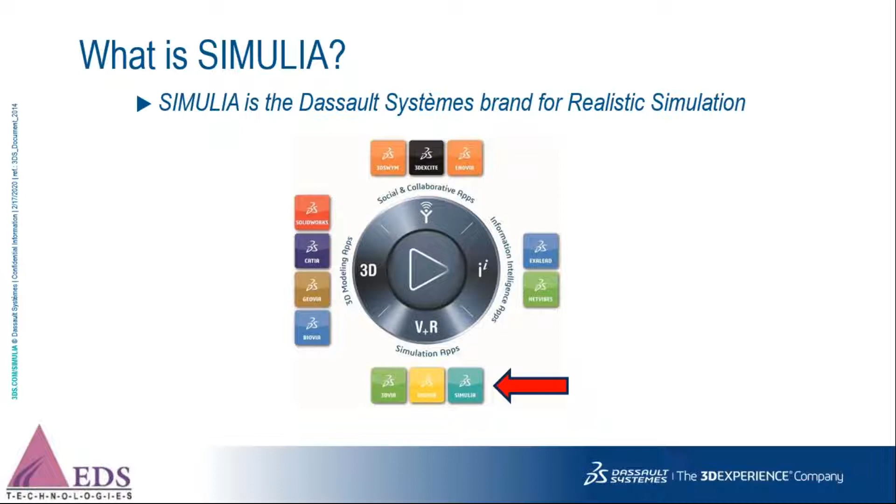So, coming to Simulia, Simulia is a brand for realistic simulation application. What is Simulia? Simulia is the Dassault Systèmes brand for realistic simulation. As you can see on the screen, a compass which has 3D, I, V plus R, and social and collaborative apps. So under V plus R, which is nothing but virtual plus realistic, all the simulation apps come under this category on the Simulia compass.

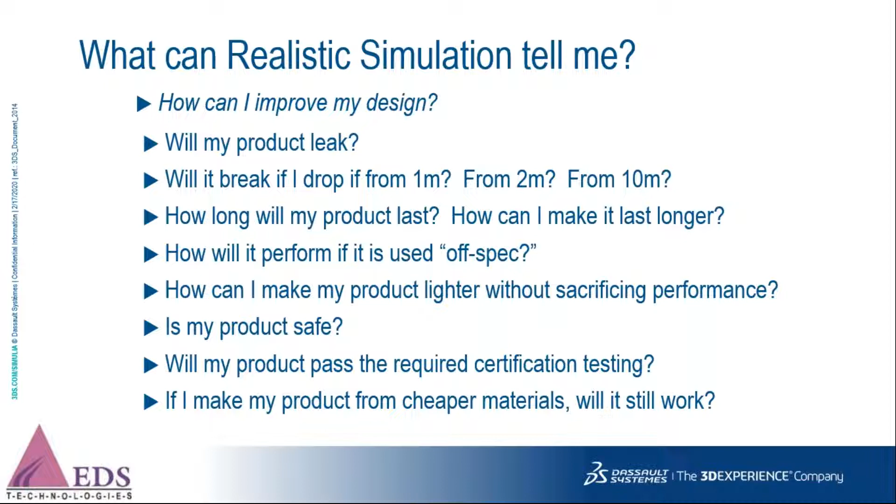Now, what can realistic simulation tell me? Most of the times, with the help of realistic simulation, you can ask questions like how can I improve my design, how will it perform if it is used off spec, as well as will my product pass the required certification testing, or even you can find about the life, how long a product will survive, etc. So all these questions can be asked and answered through realistic simulation.

Now, coming to realistic simulation, what kind of industries use realistic simulation? So almost all the verticals that we know of are using realistic simulation. Some of the examples are transportation, aerospace, heavy industry, biomedical, etc., as you can see on the screen.

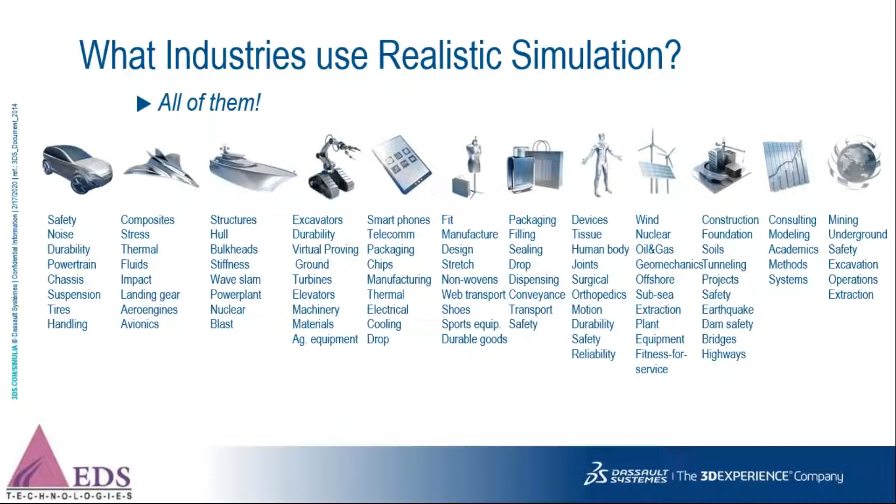Now, going more into the details, let us talk about who are the users of realistic simulation. Again, both commercial as well as academic. When it comes to commercial, designers, design engineers, simulation specialists or analysts, as well as researchers use a lot of realistic simulation to validate their tests, so that they can decrease the product life cycle time.

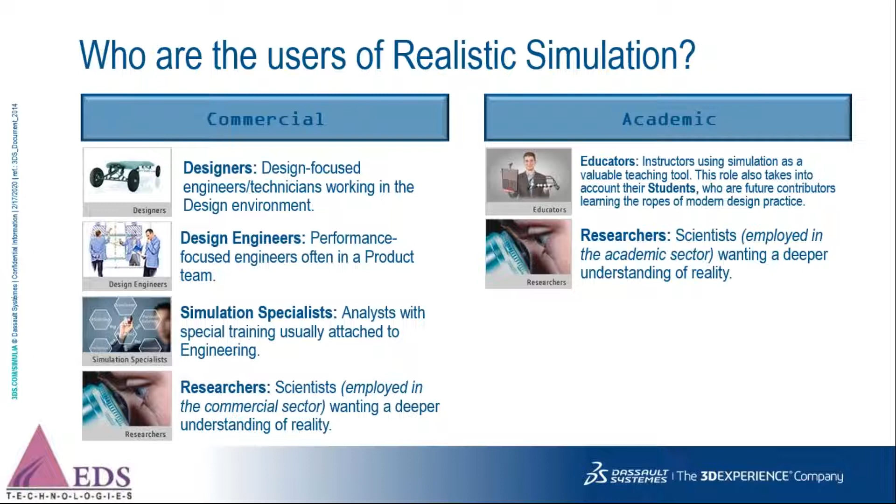As well as academic, like educators or researchers from the academic field, instructors using simulation as a valuable teaching tool. They make sure that the students are well equipped with all the simulation tools, and scientists who are academic researchers, specifically employed in the academic sector, who want to develop new technologies and want a deeper understanding, use realistic simulation.

Now, coming to Simulia's power of portfolio, what is power of portfolio? Under power of portfolio, we mainly have 4 different softwares, as shown on the screen on the left hand side. These 4 softwares are Abaqus, which is more physics and open co-simulation kind of a software.

With the help of Abaqus, we can perform Abaqus implicit or standard analysis, as we refer to, and Abaqus explicit. Then there is the coupled Eulerian Lagrangian method, fluid structure interaction method, the SPH method, the electromagnetics method, as well as Abaqus CAE, which is used to build a model, be it geometry cleanup, meshing, applying boundary conditions and loads, etc. All that can be done through Abaqus CAE.

Then comes Isight. Isight is a process automation as well as a design optimizer, which is used to run a design of experiments. Isight consists of design gateway, application components, and process drivers. So many design of experiments can be carried out through Isight, and it uses optimization techniques like Latin Hypercube, Six Sigma, etc. to quickly give results of optimization.

Then comes Tosca. Tosca is a topology optimizer, and it can carry out both structural as well as fluid flow optimization. It also has linear and non-linear optimization capability. To give an example, what Tosca basically does is, I have a baseline model. I feed it to Tosca along with the baseline results. Keeping those results as constraints, Tosca tries to carve out the best design, thereby reducing the weight.

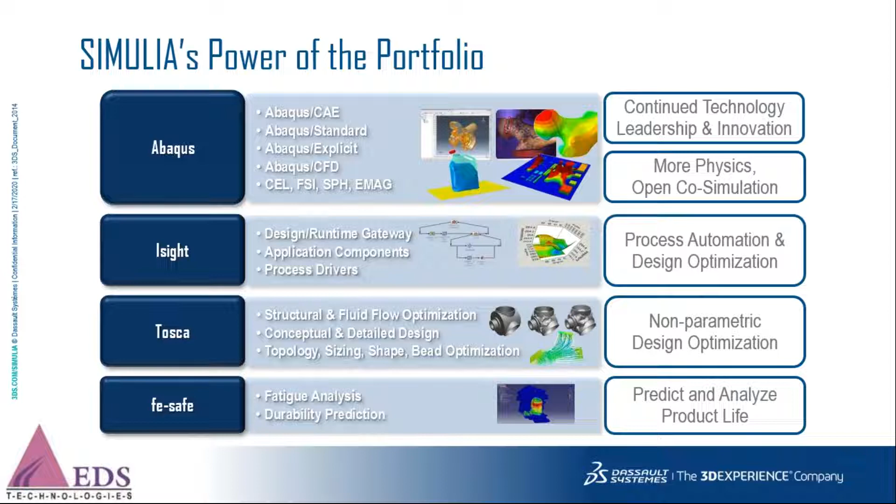So this all comprises Simulia's power of portfolio, namely the 4 softwares, which are Abaqus, iSight, Tosca, as well as FE-SAFE. Now let us have a look at an overview of Abaqus. We'll spend a few minutes on each of these 4 softwares to understand the capabilities.

So Simulia's foundation has been Abaqus, and as we all know, it's one of the world's technology leading suites of finite element analysis. The different types of analysis that can be carried out using Abaqus are linear and non-linear, implicit as well as explicit dynamics, contacts, which is one of the strong points of Abaqus, certain types of fracture analysis, composites analysis, as well as co-simulation like thermal, structural, etc. All these kinds of sophisticated analysis can be carried out through Abaqus.

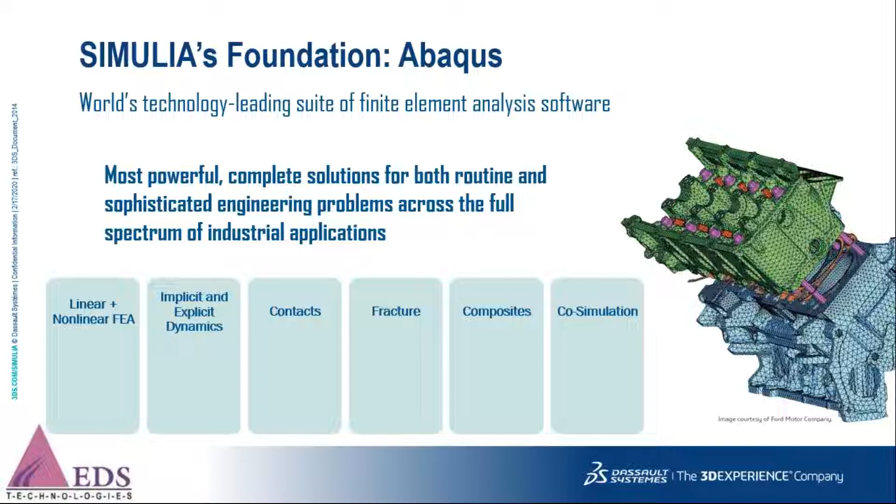And as I say, it's one of the world's leading. It's also one tool for all. So any kind of simulation, be it a dynamic, crash analysis or hydroplaning of tires or structural analysis, all these can be carried out using Abaqus. Some of the examples are shown on the screen right now.

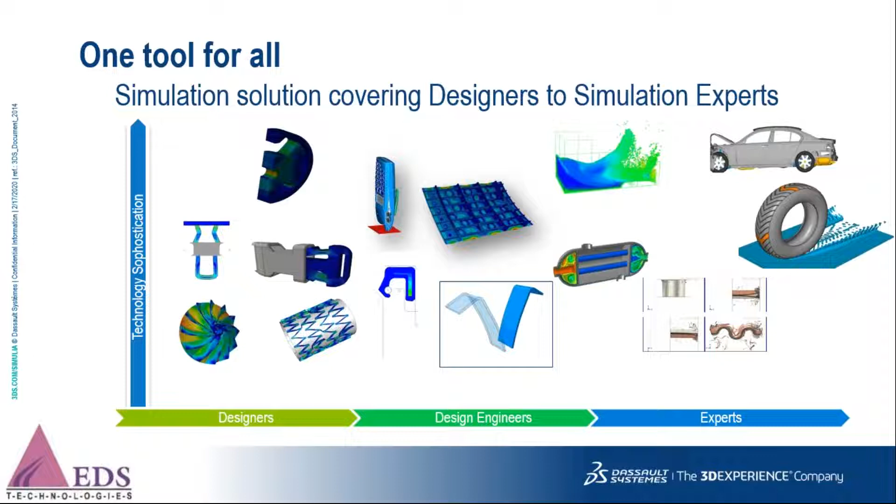Now, as I said, Abaqus products are made up of two branches. One is the solver, which you can see in the first point, that is the standard or implicit and the explicit solver. So this is mostly for non-linear engineering capabilities. And of course, these solutions are all designed for production use. All the results have already been validated, and hence I can directly use it for production use.

And then comes the Abaqus CAE. It's a complete environment for pre-processing as well as post-processing of Abaqus analysis. Abaqus CAE is a preprocessor wherein I can build pretty much simple to moderately complex parts. I can do basic CAD cleanup. We can do the meshing, load and boundary condition application through Abaqus CAE.

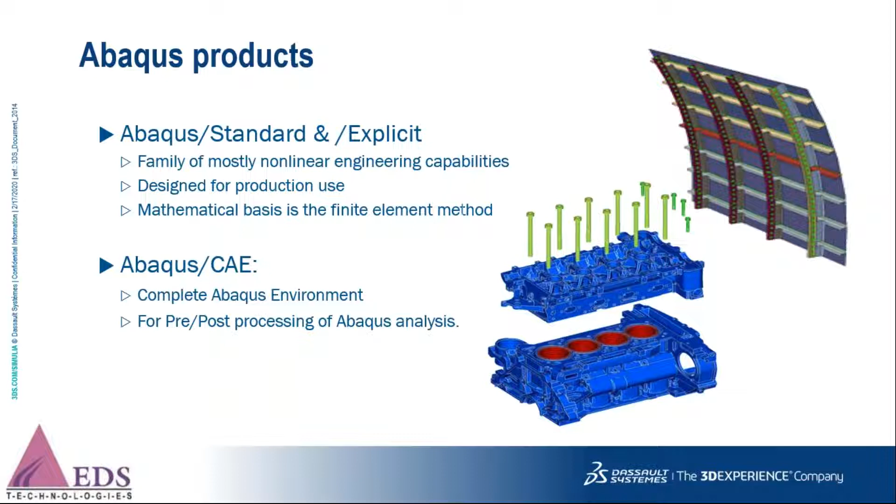And then we have Abaqus Viewer, which is one of the world's top class, best-in-class viewers, wherein I can go ahead and check my results, do hot spot result extraction. We can visualize how a certain component behaves under a certain load condition, etc. This is all through the Abaqus CAE as well as the Abaqus Viewer.

How does it all fit together? This is one example of the GUI of Abaqus on my screen. We have a dedicated SolidWorks as well as a CATIA associative interface, meaning whatever changes I make in SolidWorks can be reflected directly onto your Abaqus GUI. The layout of the GUI is pretty simple. You can see a small module on the screen. The module guides the user to set up a model in your Abaqus CAE.

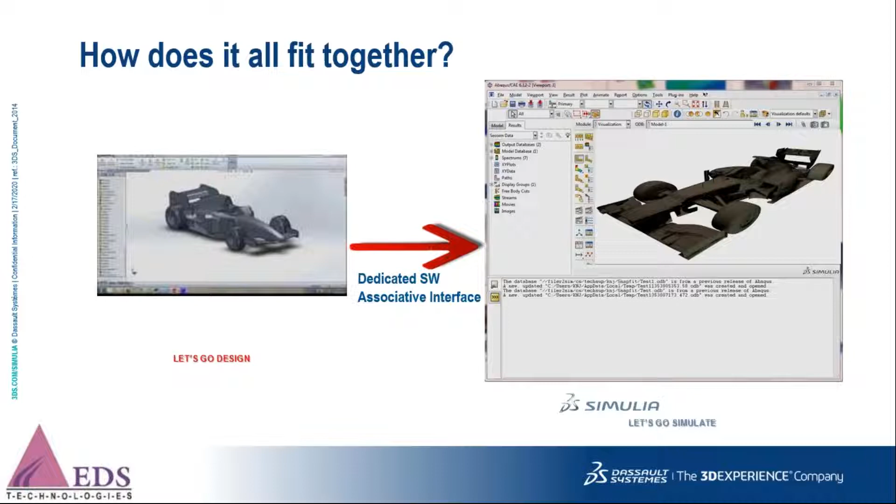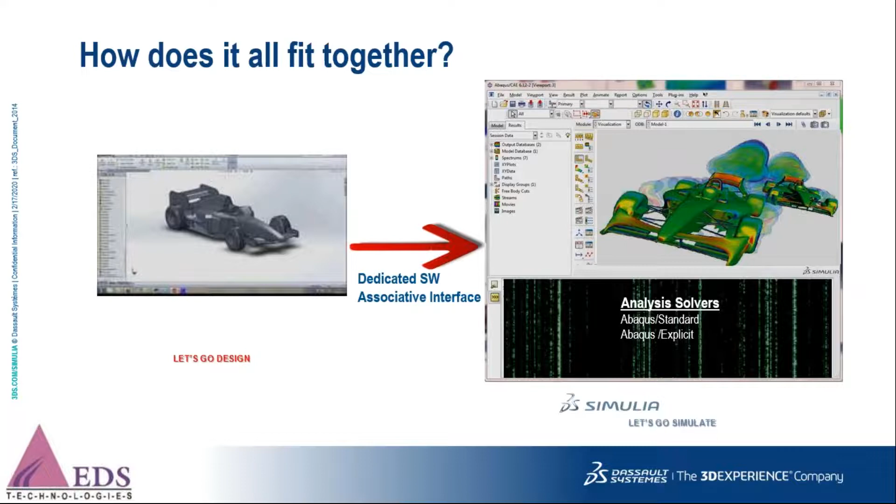And this is the viewer. So once the run is complete or once the solution is achieved, in the module, as you can see, it has been switched to visualization, wherein I can see how the load conditions are acting. So this is the viewer.

Now, Abaqus also provides solutions for an entire range of industries, be it consumer packaged goods, life sciences, high tech, energy, etc. Some of the examples again are shown on the screen. These are the industries that are currently extensively using Abaqus day in and day out.

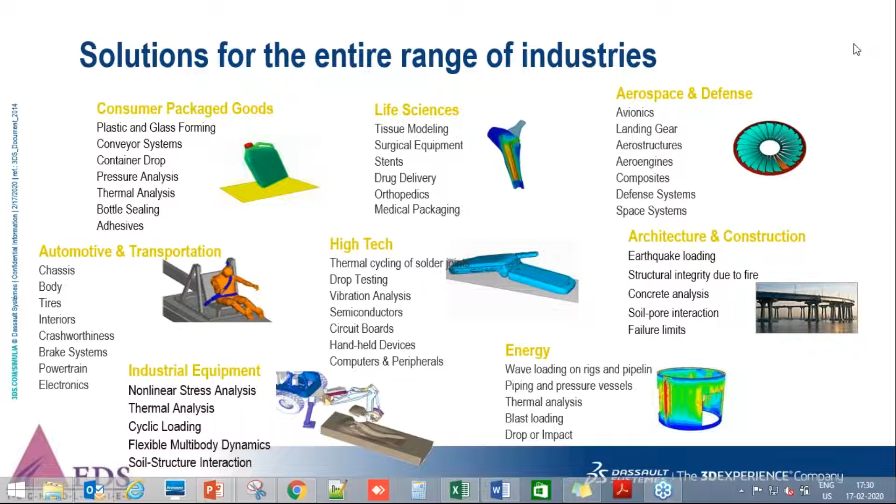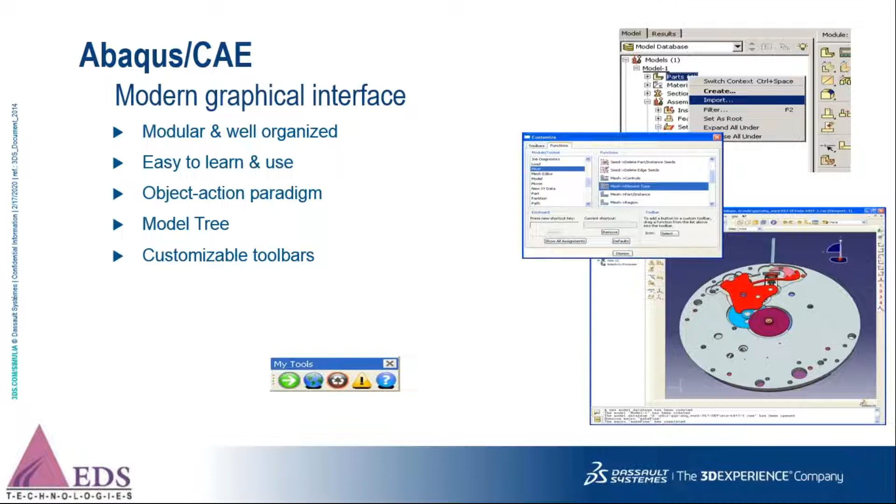Now, let us talk a little bit about Abaqus CAE, what Abaqus CAE is, what it comprises. So it's a modern graphical interface, and like I said previously, it is very well organized and very easy to use and even to learn. It also has an object action paradigm. There are customizable toolbars as well as a model tree, which makes the job easier to work on.

Again, it also has geometry and model import. So either I can import a geometry, or if I already have a mesh model from some other third-party software, I can even import that. And we can create simple to moderately complex geometry directly in Abaqus, not through any CAD software, but through Abaqus.

And the associative CAD interface also preserves analysis attributes when the geometry changes. Meaning, I have made a component in CATIA, then I have already built up the model in Abaqus. I run the analysis, and then the analysis suggests to me to make certain changes. So when I make these changes on CAD level in CATIA, all these changes are reflected into Abaqus because of the associativity, and I don't have to recreate the model or the boundary conditions as such. It is all taken care of because of the associativity. So that's what it means when I say it preserves analysis attributes.

And apart from that, a complete set of geometry repair tools. If I want to do a geometry cleanup, defeature certain features like fillets, washers, etc., if I have to repair certain faces, re-sew the surfaces if it is not watertight, etc., can all be done using the set of geometry repair tools.

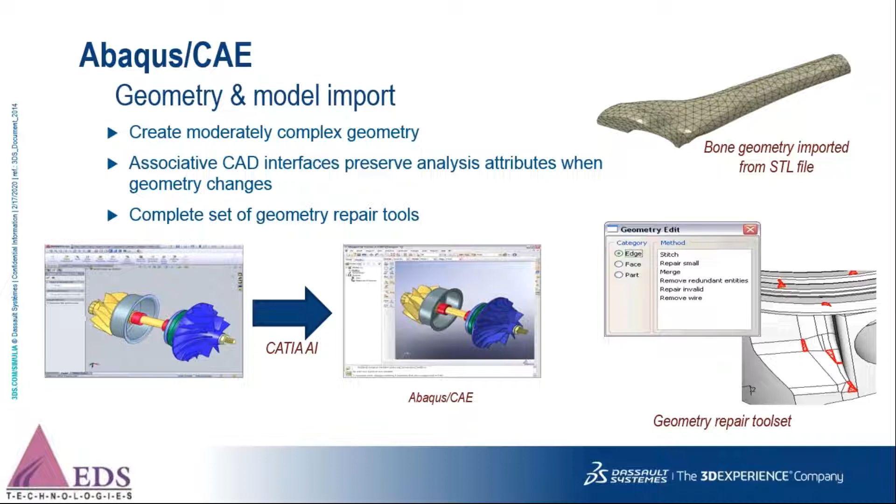Again, when it comes to meshing, very powerful and flexible meshing algorithms are available in Abaqus. It's pretty fast to create automatic free meshing, and certain semi-automatic hex meshing is also possible. As well as many different ways to import the features, mesh them and assign the mesh properties. These are all very easily and quickly accessible tools available in Abaqus CAE.

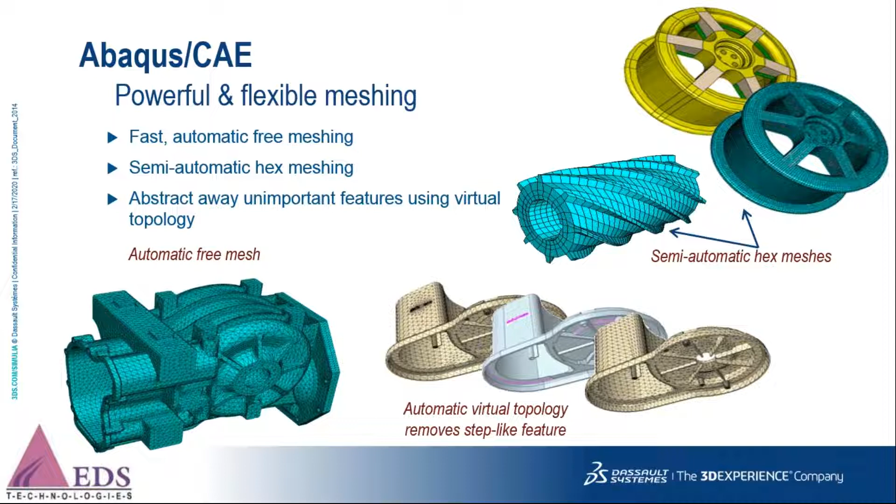And then coming to the visualization tool, it's the most preferred result viewer for all Abaqus kinds of analysis. It has very high performance with very large models. Very large model result files can easily be imported and viewed, and we have many different options like transparency, view cuts, probing, plotting, equations, etc., which can all be applied and the results can be extracted.

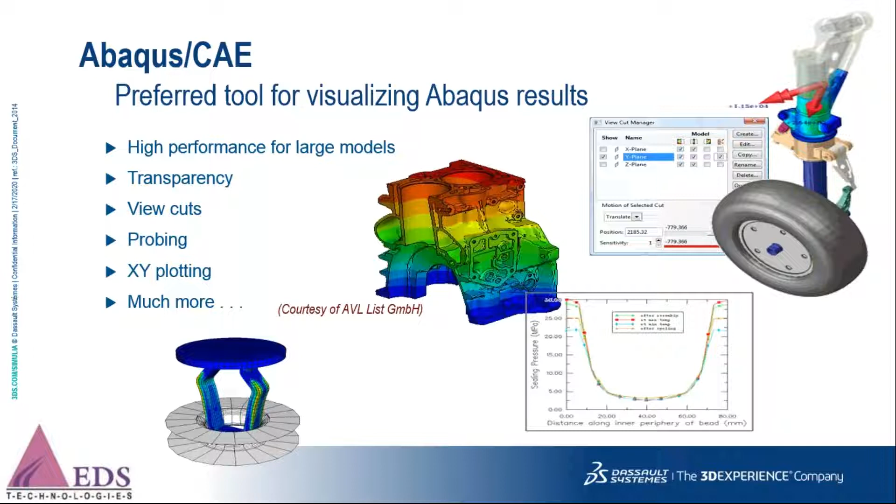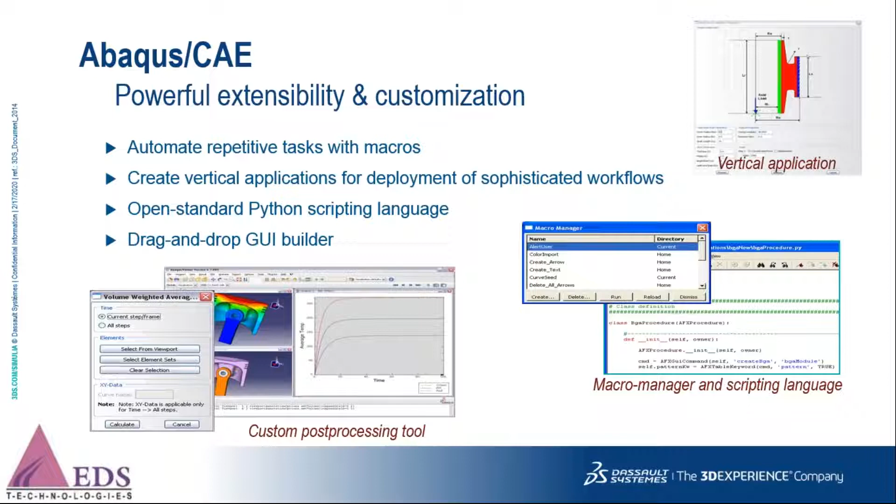And also powerful extensibility and customization is possible using Abaqus. Python scripting is available to automate repetitive tasks so as to cut time. I can create vertical applications and use a drag and drop GUI builder as required, all through Abaqus CAE.

And coming to Abaqus analysis products, as I said, we have two different types of solvers available in Abaqus. One is implicit and the other is explicit. Implicit solution techniques are mostly used for static and structural dynamic events, linear as well as non-linear behavior. Some examples of implicit functions are shown on the screen. For example, a clip insertion, a seal insertion, tire noise, gasket sealing, etc., can all be carried out using the implicit solution technique.

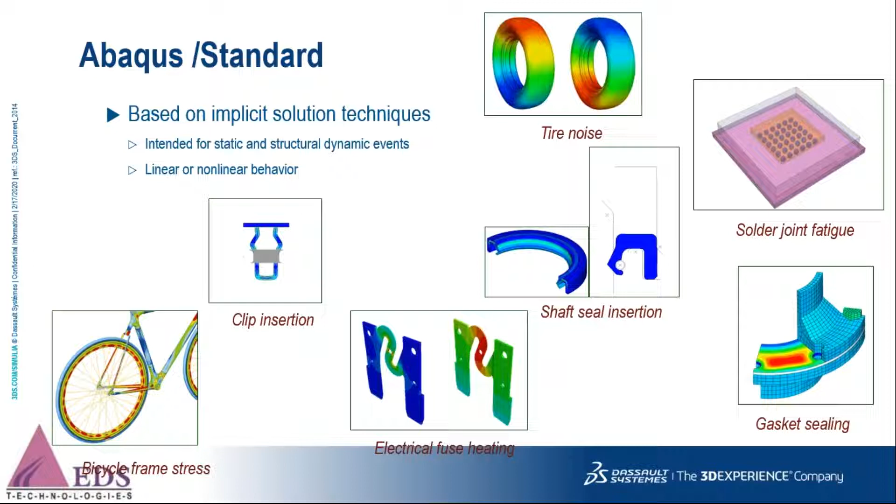Now comes Abaqus explicit. Explicit is a time integration method. This is used for high-speed transient dynamic events like a bottle drop, a crash analysis, metal rolling, blast loading, etc. This explicit solution is also used for highly nonlinear quasi-static events.

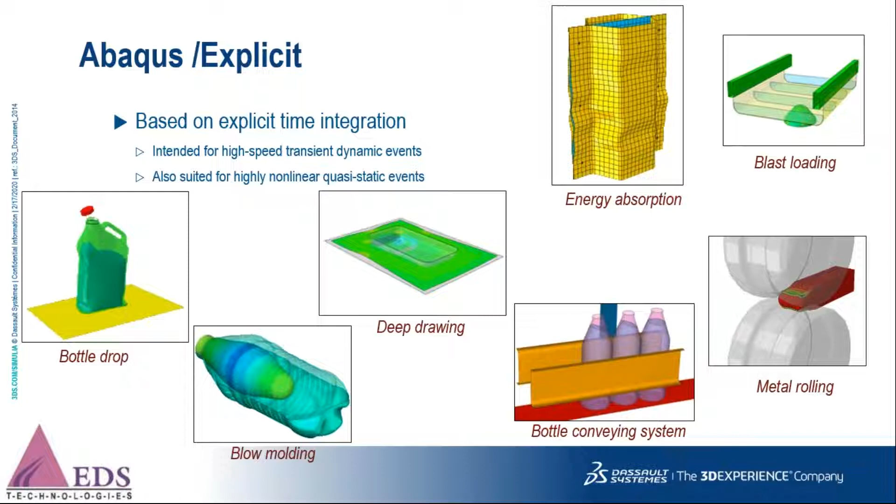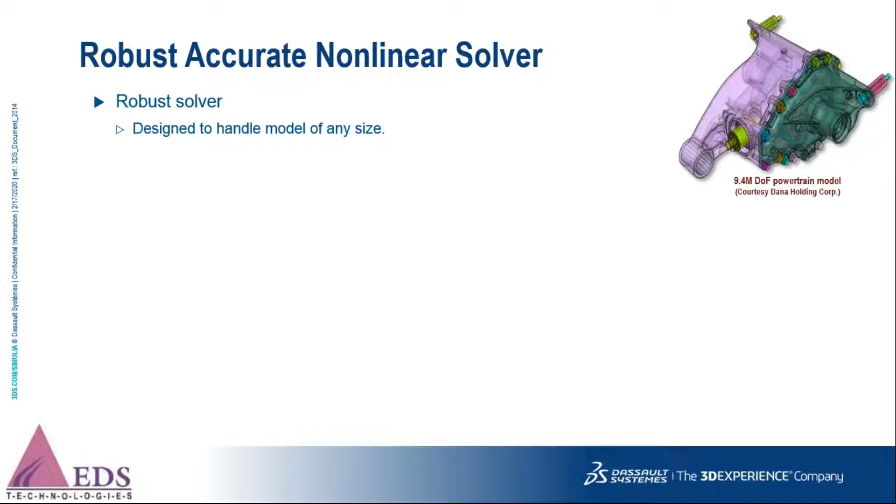Coming to the solver, Abaqus has one of the most robust and accurate non-linear solvers. It is designed to handle a model of any size, be it a small component, an assembly of components, or, in the automotive industry, a full vehicle. And it's fast solving, because the algorithms are designed so that it marches to a solution faster. It scales efficiently when using multiple cores.

One example, as you can see here, is the validation of the side impact for a B pillar. On the extreme left hand side, you can see the actual test rig where the load is applied to the B pillar, and you can see when it snaps out. So similarly, we are validating using Abaqus. So these results are all validated.

And on the right hand side, we can see runtime versus number of cores. As the number of cores increases, the solution time is reduced very much. For example, with 2 cores, it takes about 20,000 seconds for an example file to run. With 16 cores, it takes less than 5,000 seconds.

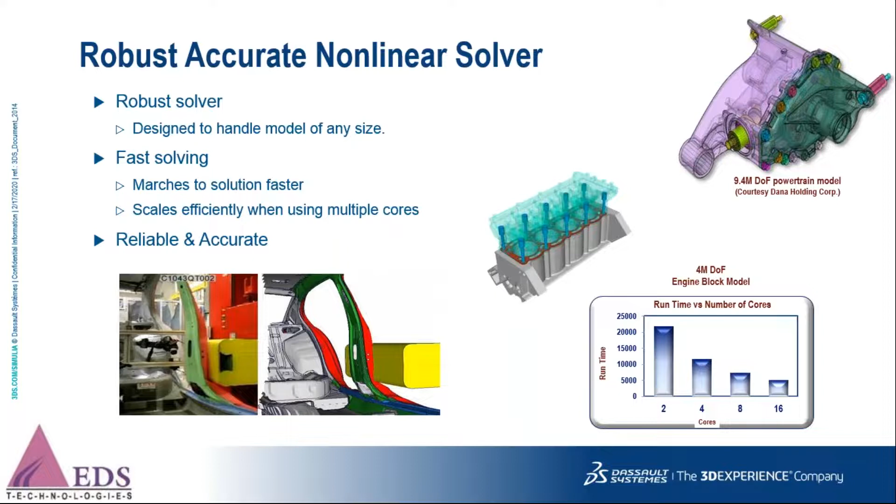So it also depends on the number of cores that the user would be using.

Contact. One of the most robust tools Abaqus has is the contact problems. Any type of contact problem can be very easily solved using Abaqus.

One of the most important capabilities is the general contact capability, wherein I don't have to specify or create any contact pairs. While building the model, I can simply tell Abaqus to use the general contact capability. When it is solving the problem, if component A comes in touch with component B, at the elements or area where contact happens, Abaqus automatically creates or activates contacts in those areas, which is one of the simplest capabilities to set up.

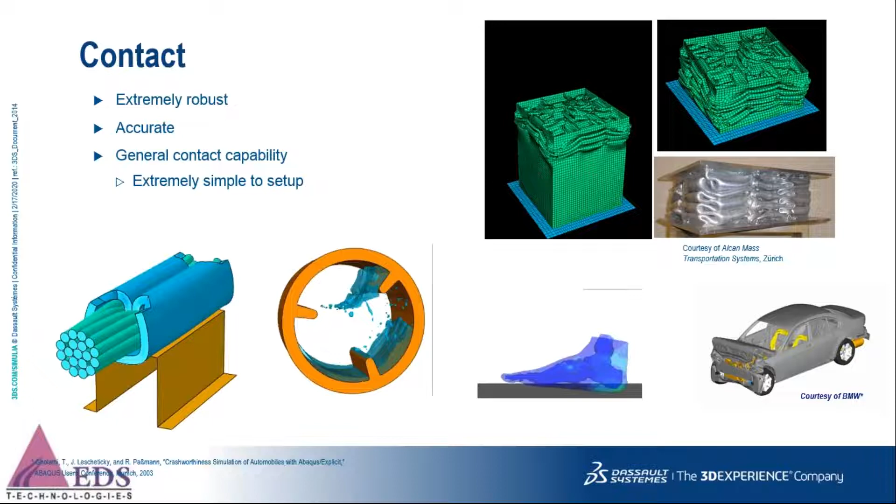Coming to material models, again, extensive material models can be created. Abaqus doesn't have a material library as such, and for that reason the user can create extensive material models. So when it comes to metals, rubbers, and composites, linear, non-linear, elastic and plastic property materials, both isotropic as well as anisotropic materials can be created.

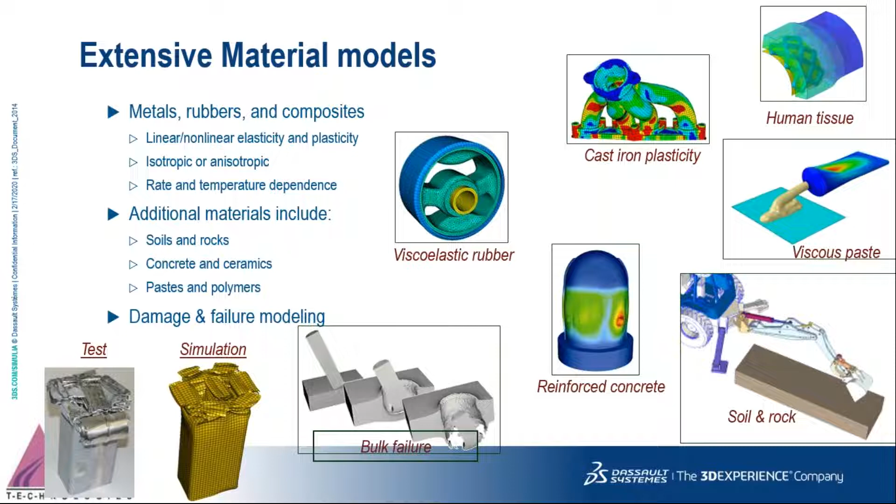Apart from that, additional materials that can be created or included in Abaqus CAE are soil and rocks, concrete, ceramics, paste, etc. All these kinds of materials can very easily be created.

Then there is advanced analysis. Abaqus can also be used for more sophisticated advanced analysis like natural frequency, including preloading effects. As you can see on the screen, step 1 is stress at 10,000 RPM, step 2 is mode shape at 9,728 Hertz, and mixing both these results gives us the final result.

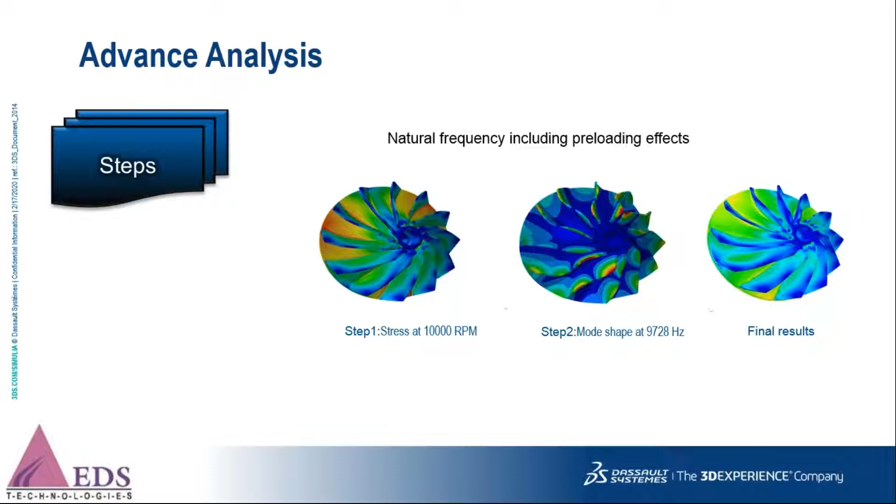That is what preloading effects are. Similarly, damage as well as fracture - you can see on the top right corner how crack propagation has been validated between the test results and the simulation. In the test, you can see where the crack is actually initiated and where the component fails. Similarly, in simulation, it is exactly the same area where the crack is initiated.

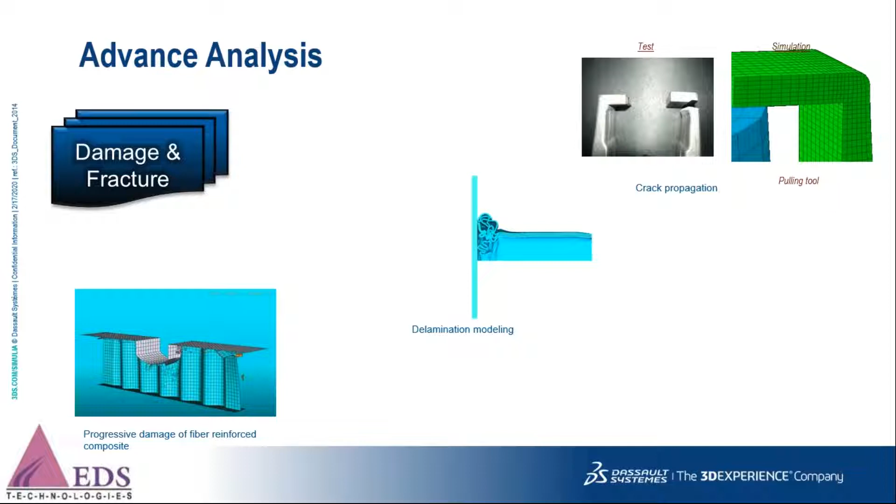Some other examples are delamination modeling and progressive damage of fiber reinforced composites. All these kinds of more sophisticated and advanced analysis can easily be set up and carried out in Abaqus.

Some other examples of advanced analysis, wherein we try to simplify the mechanisms by using rigid and deformable mechanisms. So instead of using the components, we take into consideration the rigids and links.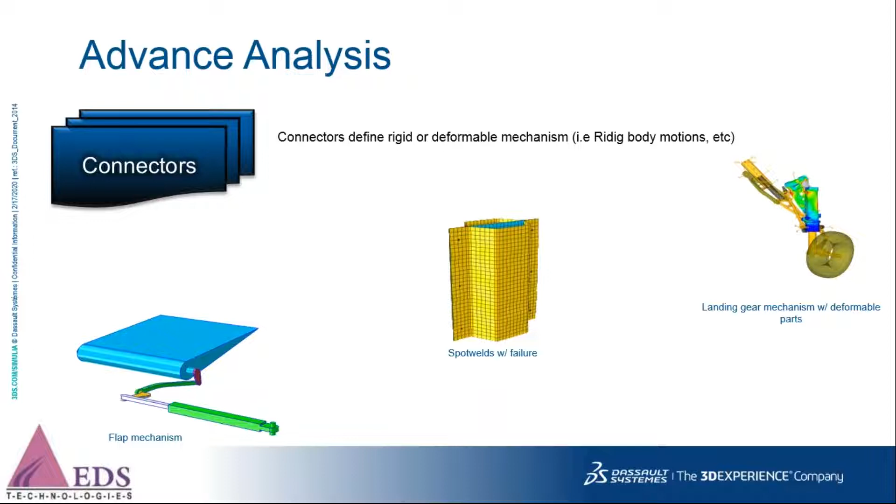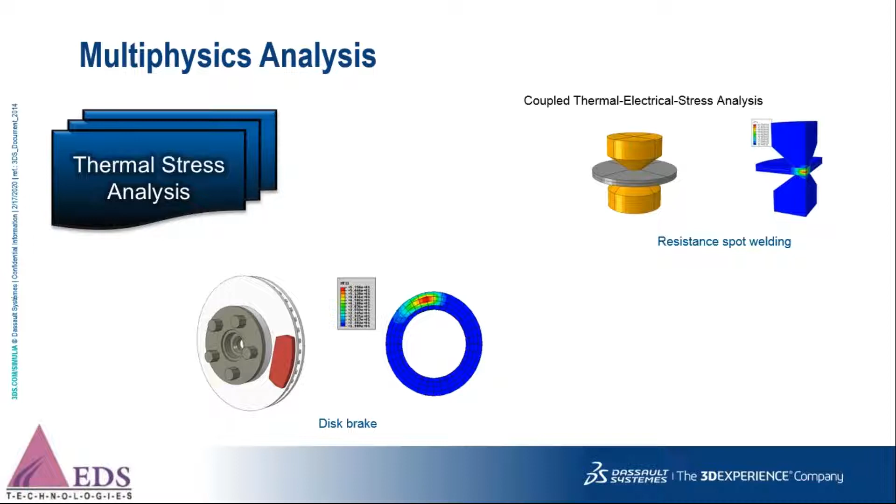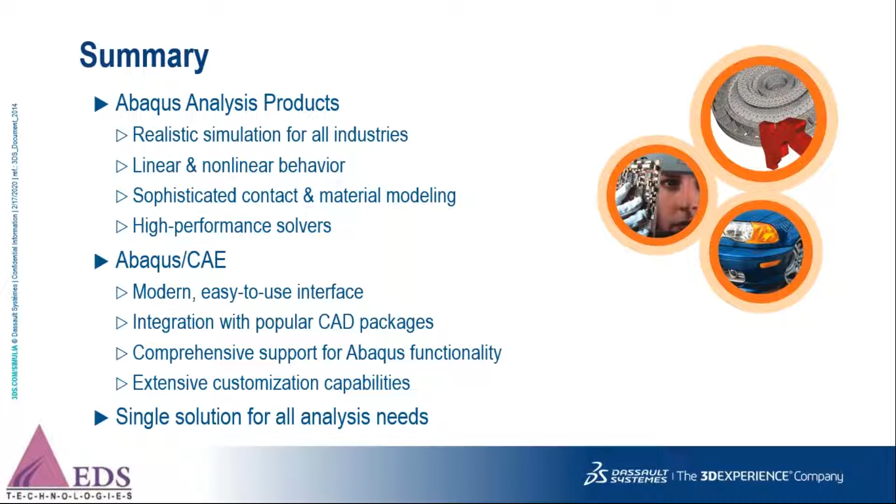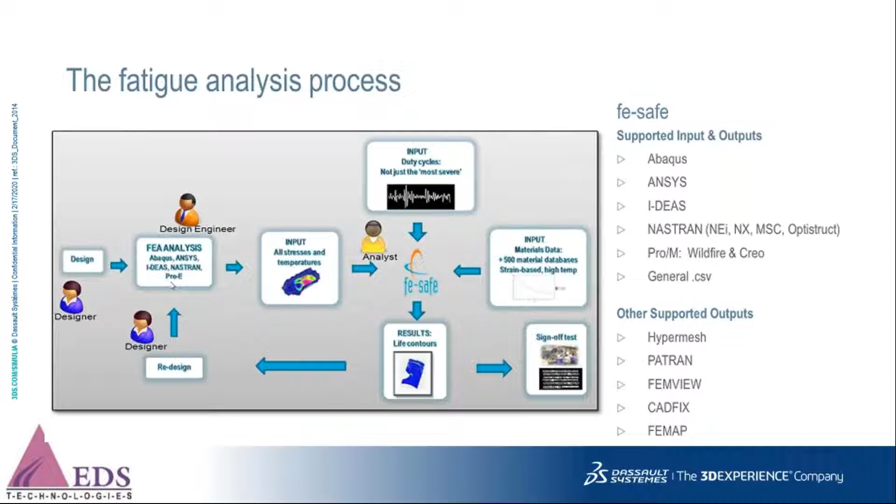This is all the process for FESAFE. Now, coming to FESAFE supported inputs and outputs, you don't necessarily have to have a file run in Abaqus for FESAFE. Any other files, if you have analysis done in ANSYS, I-DEAS, Nastran, Pro/Wildfire, Creo Elements, etc., these can all be supported inputs and outputs for FESAFE, as well as other outputs supported by FESAFE such as Hypermesh, Patran, FEMView, CADFix, and FEMAP.

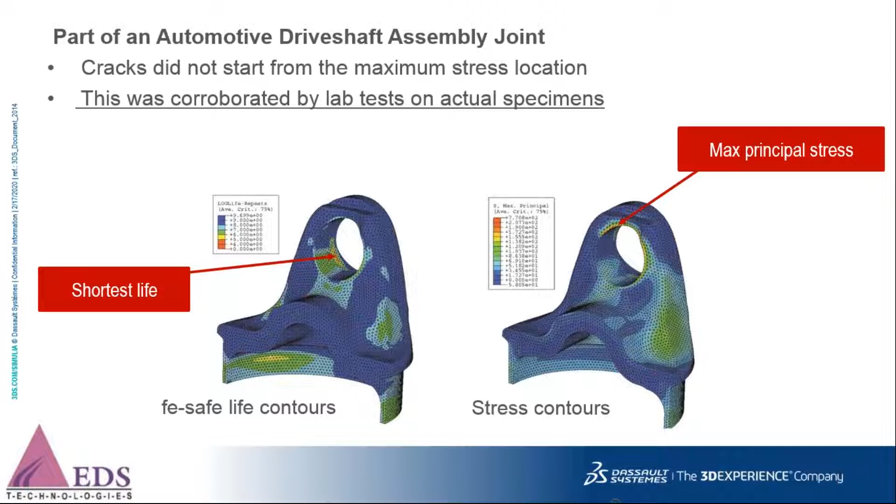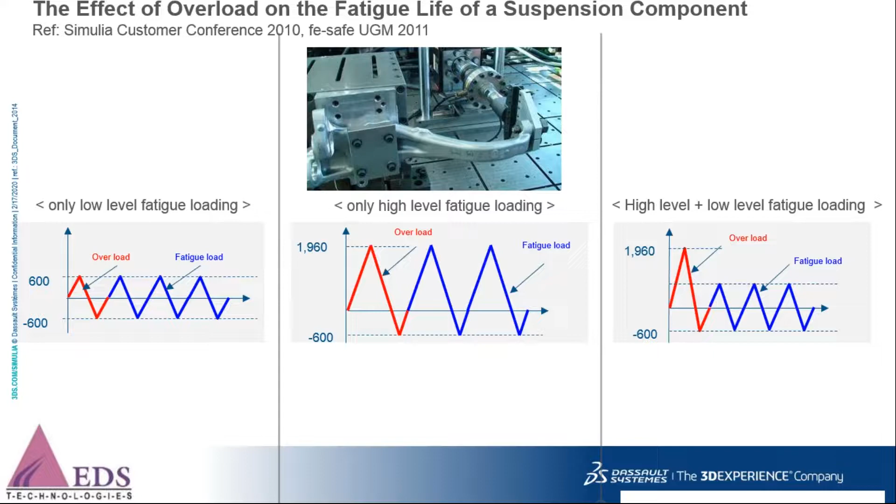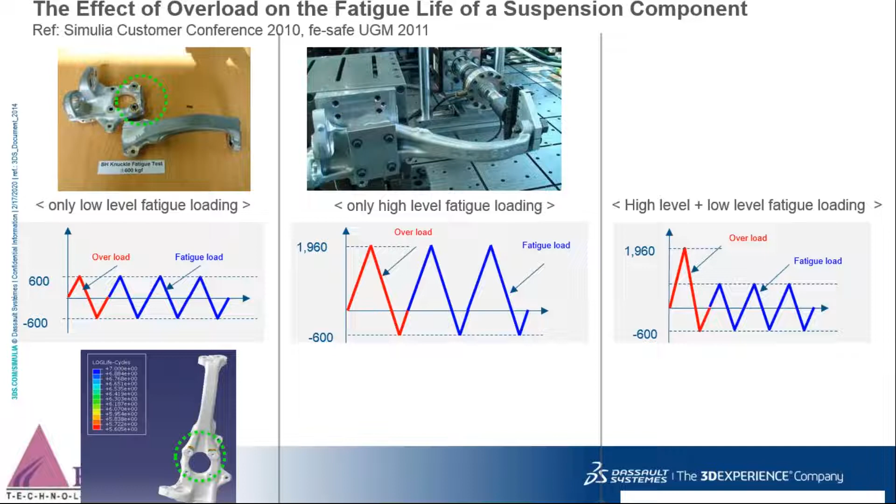Now, some examples of the effect of overload. On one side we can see only high-level fatigue loading, and on the other only low-level fatigue loading, and we can see where the part is failing. At the bottom of the screen, you can see the life cycle predicted by FESAFE, and it exactly predicts the same location where the actual component has failed. For only high-level fatigue loading as well, the part that failed in the test rig is exactly the same location that FESAFE predicted.

Now, what if I mix the load factor, combining high as well as low levels? In that case, we can clearly see the failure location of the component is completely different compared with low-level fatigue loading only or high-level fatigue loading only. Not only can we see that in the test rig, but the software also exactly predicts the same location. This shows how much the software has already been validated, and all the results FESAFE predicts are highly accurate.

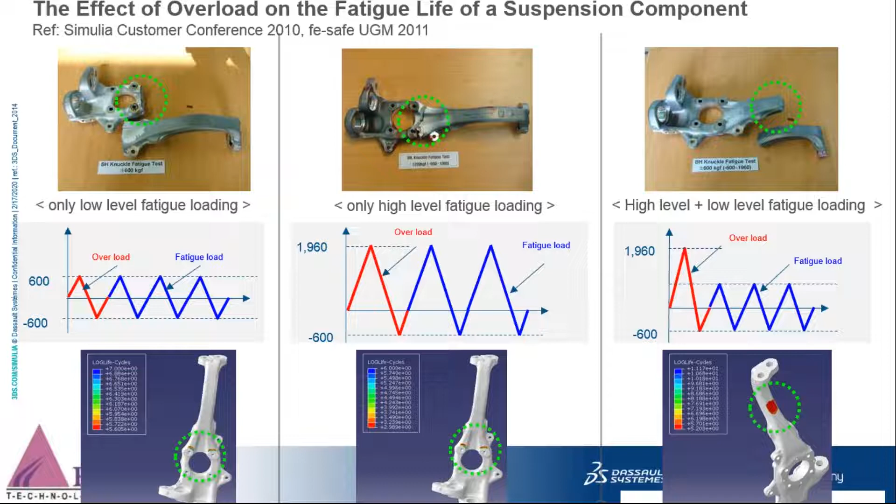Now, a little overview of Tosca. We'll see what Tosca is and what different types of optimization Tosca can help the user with. As I had said previously, there are four different types of optimization that Tosca can do.

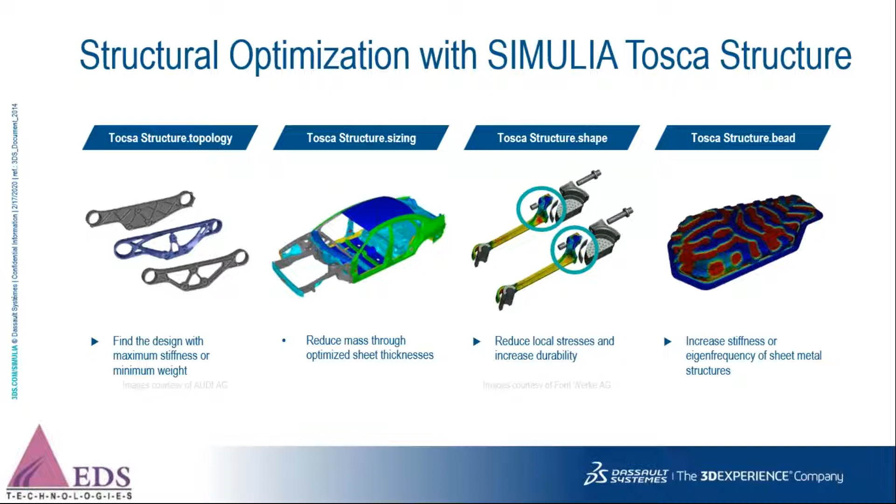And the fourth one is Tosca bead optimization. This helps increase the stiffness or eigenfrequency of a sheet metal structure, and Tosca will predict where the beads should be applied onto a given sheet metal. So these are the four different types of optimization that can be carried out using Tosca.

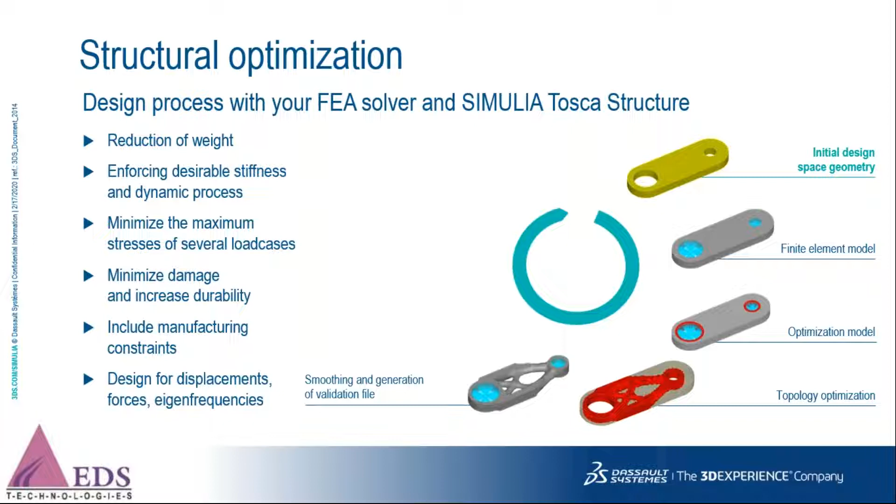And that is what we can see currently. So all the red color is the final product, and all the gray product is the material that it has removed, thereby saving that much amount of material. Then smoothing, again, as you can see, the red color one, the previous one is a rough cut, so Tosca does a smoothing and gives us a validation file.

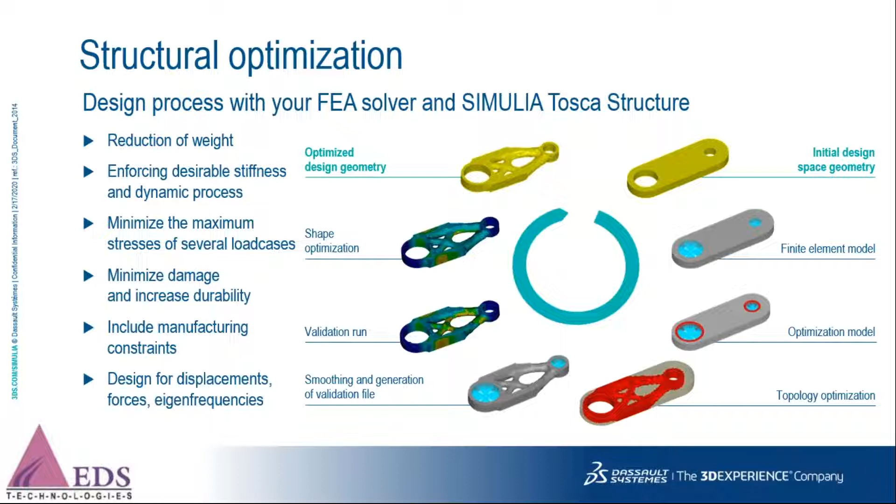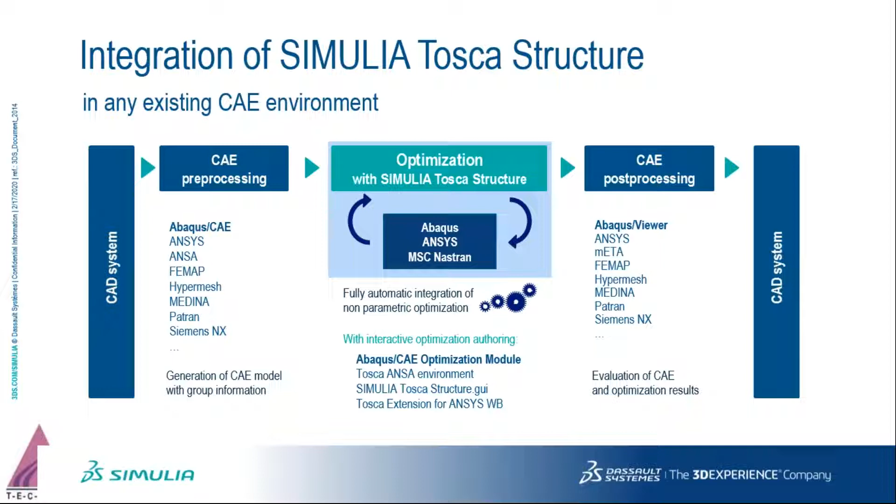And it's a fully automatic integration of non-parametric optimization. Then we can send it back to CAE post-processing, and you can use Abaqus viewer to view results, be it ANSYS, be it Meta, FEMAP, etc. So all these can be easily integrated so that you can use Tosca not only with Abaqus, but also along with ANSYS, ANSA, FEMAP, Hypermesh, like we have already suggested. And the integration is pretty much simple. There is no complexity involved at all.

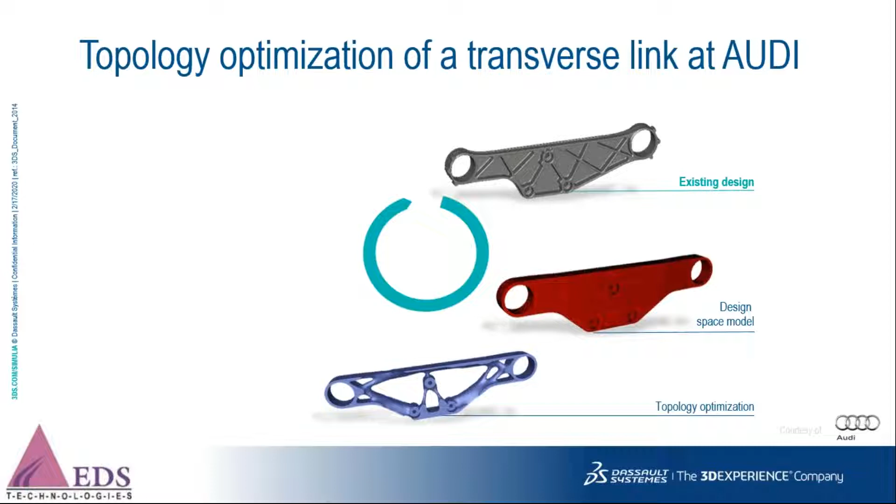So this is one of the examples. This was a topology optimization of a transverse link at Audi, and you can see an existing design already. So a design space model was created. Basically what we do is we fill in all the features and make it a space model, as you can see in the red color. And then it was fed to Tosca. It's again the same process I've previously talked about, along with the results.

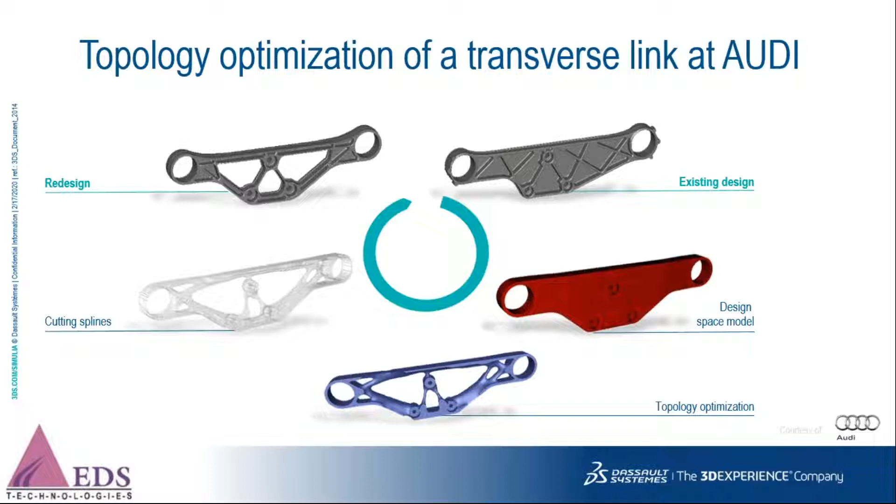And now Tosca will carve out the best design. These are the cutting splines, and this is the redesign. So starting from the existing design, we can see the newly designed or redesigned product adheres to the same given conditions, loading conditions, but at the same time we can see material has been drastically reduced, thereby saving cost.

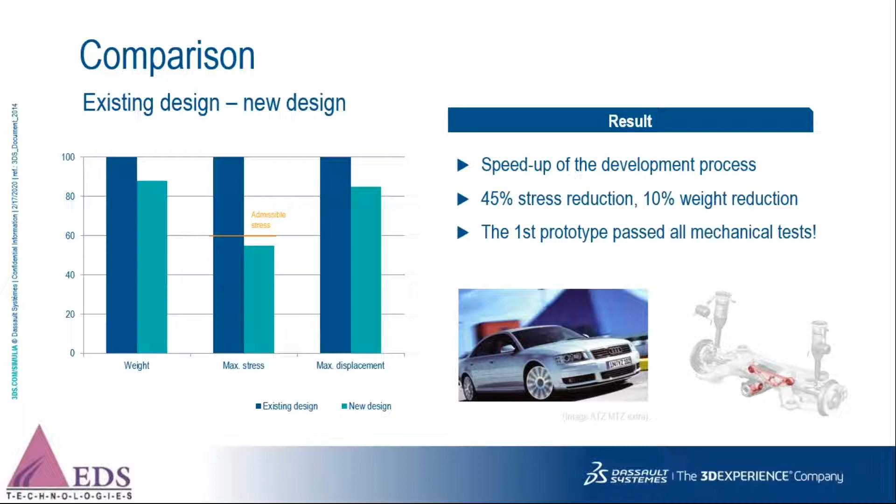And now coming to an overview of Isight. Like I said previously, Isight is nothing but a parametric optimizer used for design of experiments. We call it an Isight software robot, which helps a user to automate a process. So what basically happens here is, as an engineer, I can define the simulation process and design goals, and we can automate the input generation, run, and output extraction.

So what this means is I can link in, say in this case, I'm going to talk about Abaqus. I can link Abaqus to Isight, and it will be a cycle. So I'll create a design in Abaqus and automate the process. So what Isight does is, once the model is built in Abaqus, the model will be pulled into Isight.

Then Isight will run its design of experiments and then feed the new design of experiments back to Abaqus, wherein Abaqus will build the models and rerun those. This is just an example.

And as you can see on the right hand side, I have a design concept. I build a computer model. I choose a strategy, be it Six Sigma, be it Latin Hypercube or Hypercube. Then we adjust the input files, we run the model, we review the output files, and we check if the requirements are met. If the requirements are met, we simply move on to the final design. If not, we rerun this whole process.

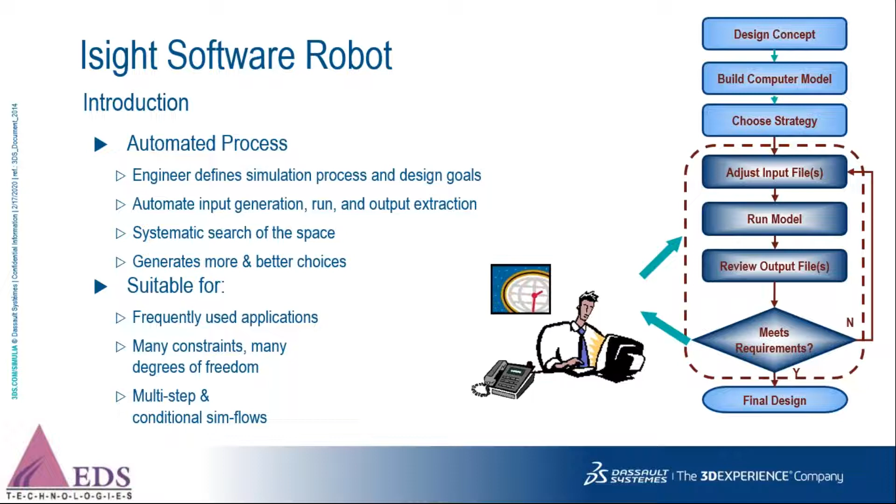And Isight is very much suitable for frequently used applications. And if my model has many constraints and many degrees of freedom, and it involves multi-step and sim flows, conditional sim flows, etc., Isight can be used.

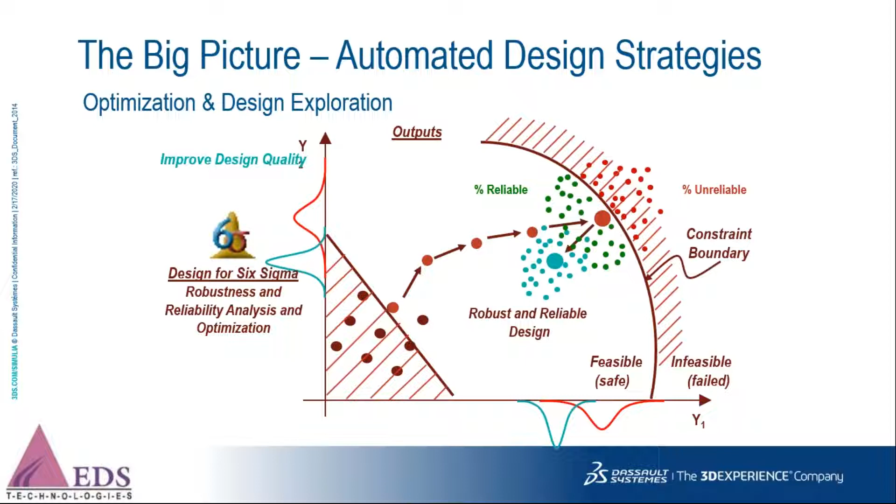Now, out of that, whichever is closer to this constraint boundary, I will be picking it up, because there are so many different constraints, manufacturing constraints, and we have to look at all those and choose the best design out of it. And that's how I chose the most robust and reliable design.

Now, what are the benefits of Isight? It reduces design time. It has a template for frequently used design processes. You can automate parallel submission of optimization, and algorithms like Monte Carlo, DOE jobs on multiprocessor machines, etc. can be used. I can improve the quality, design to target for simulation attributes.

Again, it also helps us to understand my design in a better way. It can also help us to understand what parameters are influencing the design targets. Is any parameter helping the design to be better, or is it helping it to fail? All these kinds of design understanding can be done through Isight.

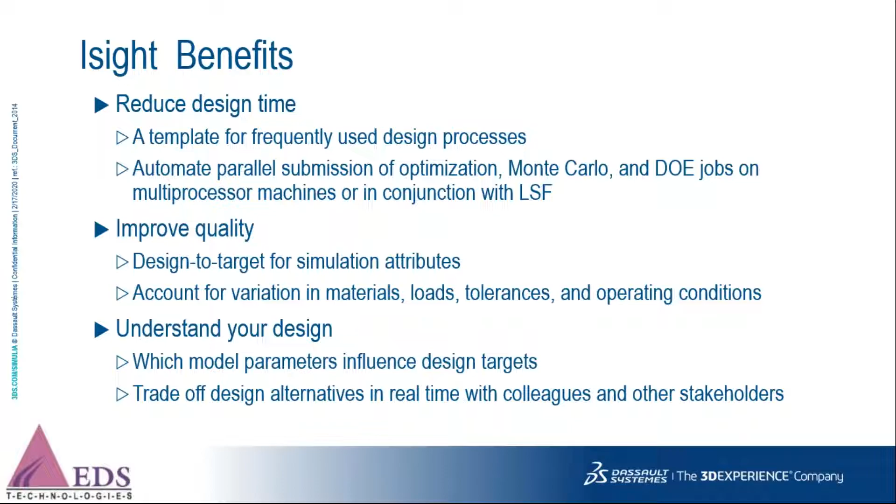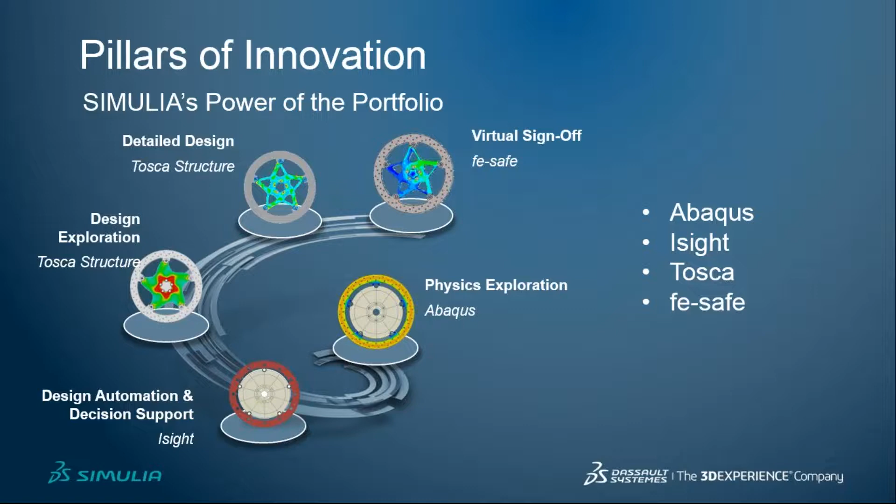So this whole process is being done by using Simulia's power of portfolio, that is Abaqus, Isight, Tosca, and fe-safe. This is how the power of portfolio can help you to come up with the most reliable, robust, and best design quickly, instead of moving from solution to solution.

Now let us talk a little bit about token requirements. Because currently what Simulia Power of Portfolio means is you don't have to buy all these four software separately. It is based on tokens, and the tokens are shared between all these four software. So if tomorrow you buy n number of tokens, you will not only have Abaqus, but you will have Abaqus, Isight, Tosca, as well as fe-safe. You don't have to spend extra and buy these software separately. They all come under one platform, and hence we call it Simulia Power of Portfolio.

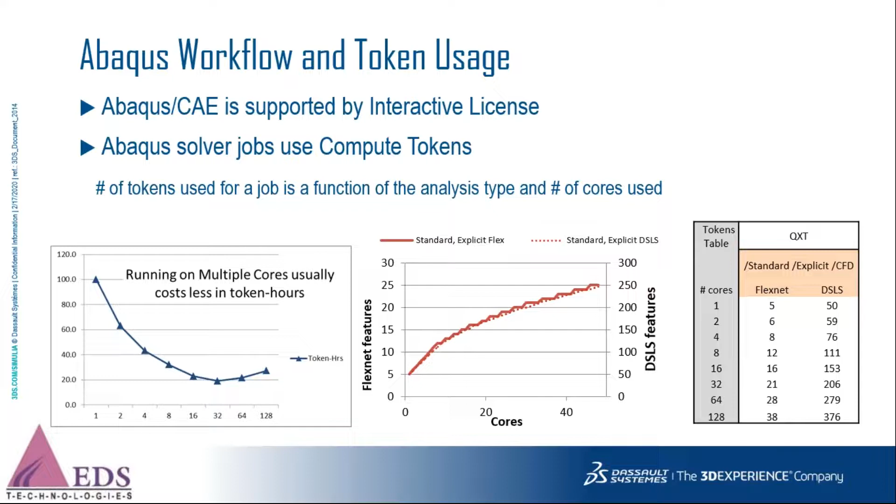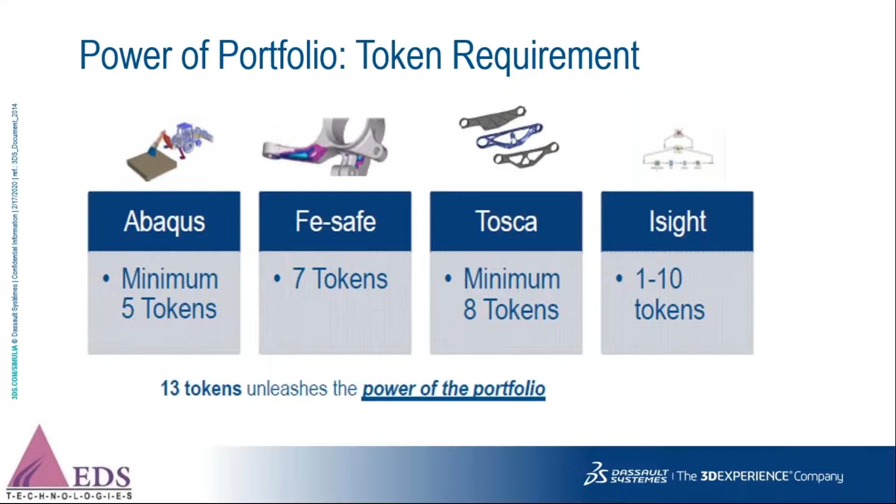So if I have 5 tokens, at a given point of time, one user on one core can either use Abaqus or Isight, because the minimum number of tokens required for Isight is 1 to 10. So with 5 tokens, I can use either of the software at any given point of time. And if I have 13 tokens, I can completely unleash the power of the portfolio. I can run Abaqus or fe-safe or Tosca, both linear as well as non-linear, or Isight, but one at a time, not simultaneously.

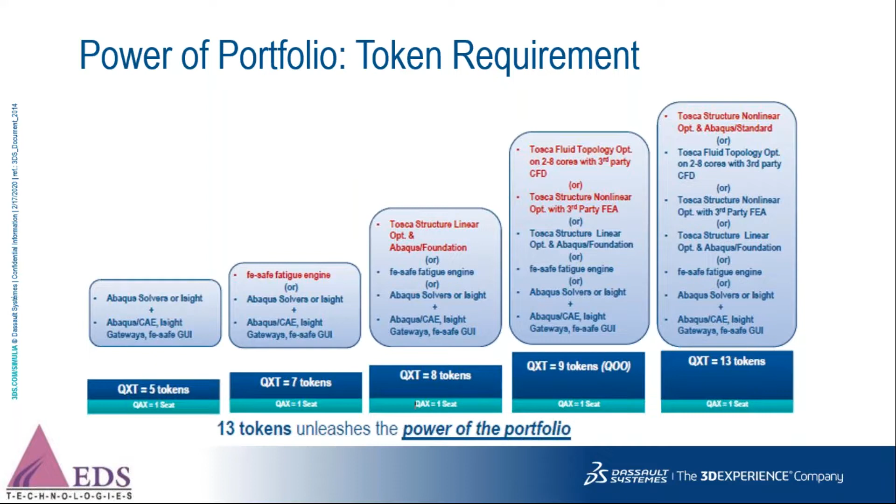Now, what are the benefits of Power of the Portfolio? First of all, instead of buying these software separately, when I buy Power of the Portfolio, it is 2.6 times cheaper as compared to buying them individually. And it is very simple to use. Basically, I have extended GUI licenses, which comprise the Abaqus CAE GUI, the Isight Design Gateway GUI, the Isight Runtime Gateway GUI, the fe-safe Interactive GUI, and the Tosca interface.

And extended tokens are nothing but the solver tokens. And these solver tokens can be shared between the Abaqus Solver, Isight SimFlow, Isight process components, as well as Tosca Structure, Tosca Fluid, and the fe-safe solver.

And depending upon your requirement, it can be easily scalable. So if you want to increase the number of cores or the number of users, you don't have to keep buying the software. All you have to do is simply keep adding tokens, which will again be cheaper as compared to buying the software as a whole.